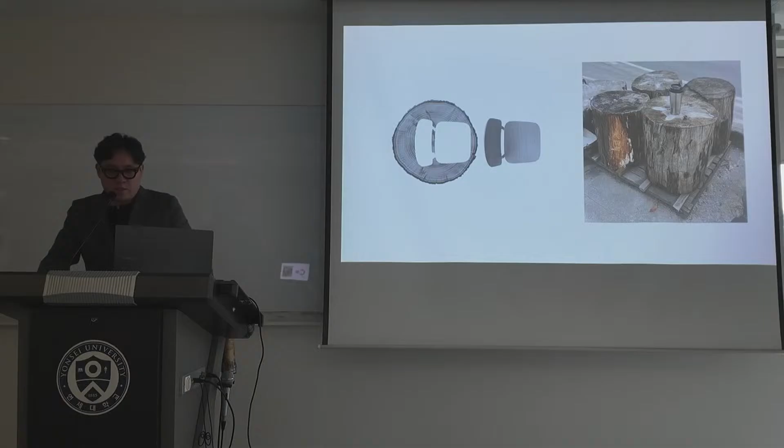Some people start architecture from the final image and imagination, but I just started with this image. This is an old, rotten log base from a wood sawmill that I saw about 2 years ago, and it was about to be thrown away. So I asked them to protect and preserve it, maybe I could use it later for some purpose. I'll come back to this image later in this presentation.

I want to use two words to frame this entire presentation. I'm actually planning not to give an architectural portfolio presentation, but to provide more of a framework for understanding Korean architecture and how we got here. The formwork is a temporary frame, right, to hold the concrete that is poured into it. Formwork is a mentality, a way of working that I'm framing in that way. So in formwork manner, you first imagine the final form, right? Then you build a temporary frame around the final shape, and the material is poured into it.

Then the form is removed and thrown away. So in this construction work, you always come up with the form first, the final form. To me, the final form is determined very early by this construction technique, form comes first and material follows. The framework is different - a frame is not a mold. A frame is made of parts - it's made of beams, posts, joists, rafters, and each one is part of the construction.

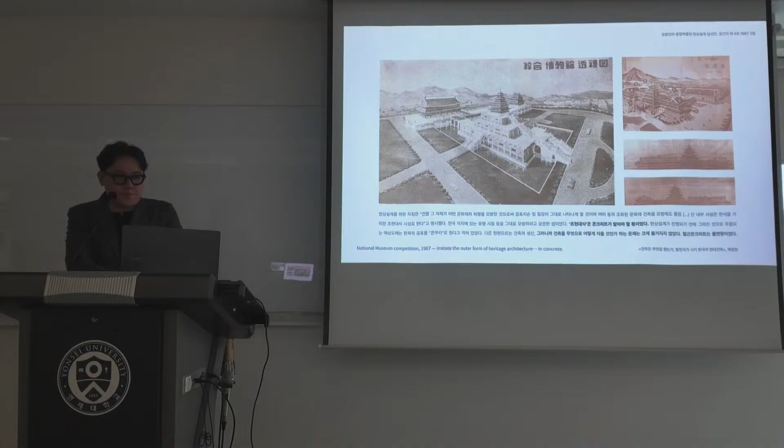1967 is a key moment. We see this even more clearly in Gwanghwamun, the south gate of Gyeongbok Palace. The great gate of the main palace was rebuilt in reinforced concrete. The curved roof, the brackets, the profile of timber structure, all cast in concrete. Very powerful image, right? The image of wood produced through formwork, so timber tradition translated into a concrete method.

It's like a Parthenon temple. You've heard of it, probably from a history course. The Parthenon temple was a representation of wood architecture. The columns, the triglyphs, all of those are representations of wood beams and such. So it's very similar.

I don't say this only to criticize it. It belongs to specific historical moments of our architecture industry. There were pressures of speed, pressures of politics, and pressures of symbolism. But it shows something clearly: wood survived as representation, but not as construction.

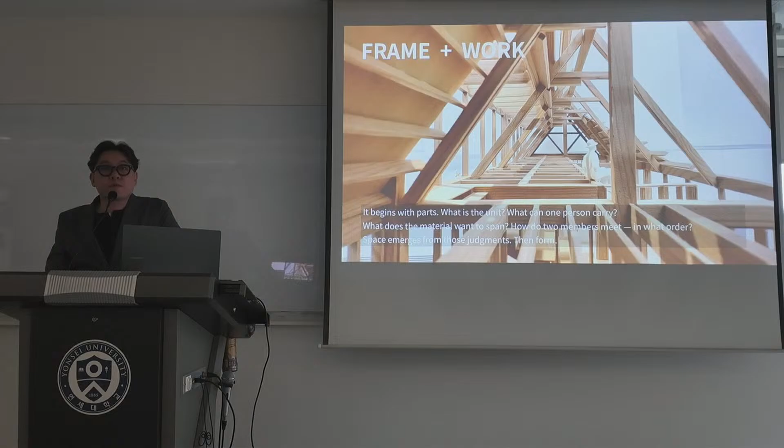So let's make the concepts a little simpler. First question: where does design begin? In formwork thinking, design often begins with an image of the whole. It's true, it is true.

And then we look for techniques to support it. In concrete structure, mostly design, the image comes first, then the details. Someone sees images on Instagram—nice image design, final product, oh it's really good, has good detail. It means details are very secondary to support forms, not the question itself. It's just a kind of cosmetic makeup of the concrete form.

But then we look for techniques. In framework thinking, design can begin with a member, a module, a kind of rule—spacing, like 18 inch on center, 16 inch on center, that kind of thing. A module, a rule, a joint, a repeated action—it's kind of parametric. But both approaches can produce form, they just arrive from opposite directions, as I previously talked about. I think buildings can feel the difference as a final product.

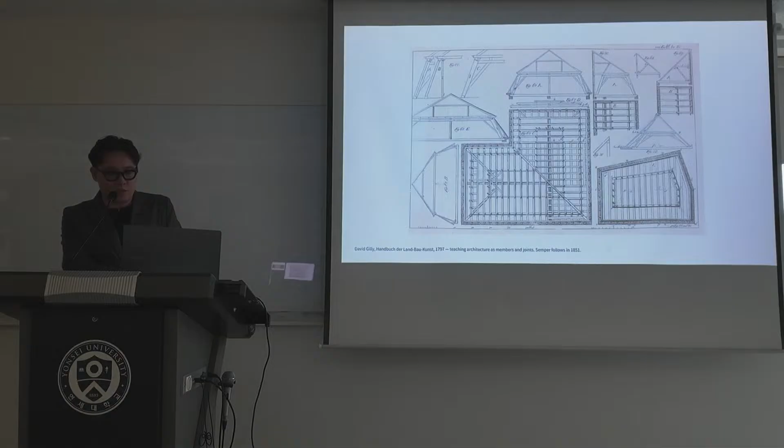Architecture was taught not only as image or composition, but as a language of members and joints from these kinds of books. Later, Gottfried Semper kind of followed this tradition. Then this logic becomes radically practical, of course, in America.

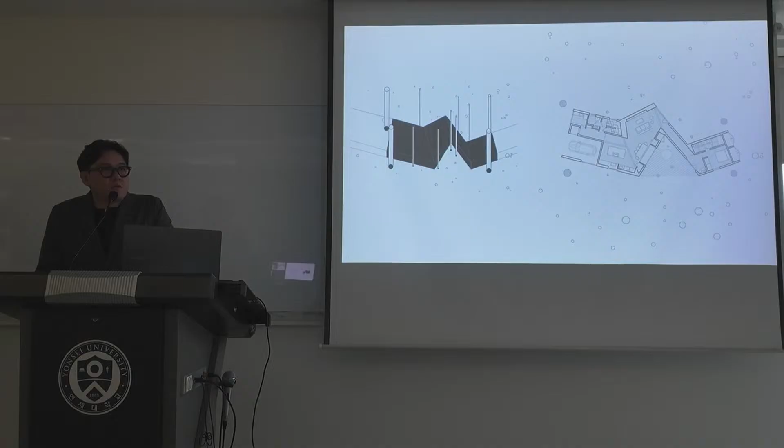So this was the plan. There were 11 existing trees, and I started to build a house through these trees. Often we just kind of scrape off the site — oh nice, that's good, straight off the trees — and build a boxy, modern, nice-looking house. But I started to actually use the trees as a design constraint. I thoroughly prepared the setback lines from all those trees and started to build my own setback line, and came up with this plan.

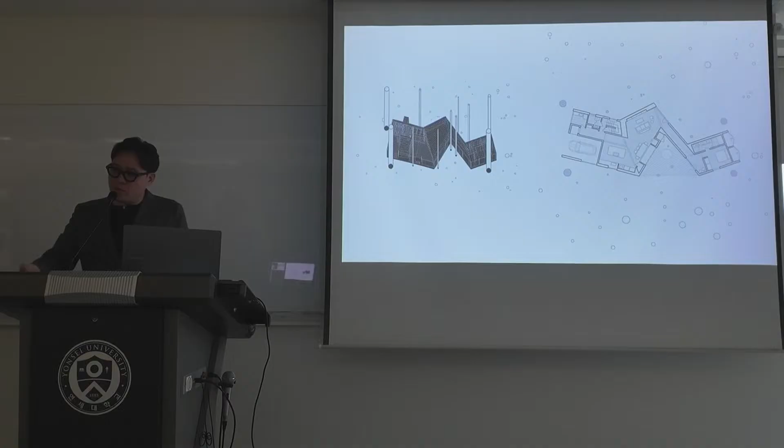The plan is not a series of rooms, it's a flow of program. I did not use any swing doors, to accentuate the continuity of the entire space. I only used sliding doors with a lot of gaps from the bottom of the floor. And this is a very interesting picture and diagram as well.

Actually, this region had a special zoning code — it's a heavily wooded area. Natural preservation, all those things come into the zoning code. So if you have an architecture development, you have to measure the trees on site at a certain height. It's called DBH, diameter at breast height — about 4.5 feet from the ground — and you measure the diameter of the trees on site. If you exceed a certain size, you cannot cut it down. But if you're under that certain diameter, you can do whatever you want.

But we have to submit a form of tree removal, and it has to match the survey — the actual site data of the diameter of trees on site. So I started to utilize that rule as a kind of reverse design alibi. I'll use that, I'll accept that — that line becomes a kind of deadline for the trees, the 18 inches. If you're under that, the tree would be thrown away, but I used it as a design element. So that line actually remained as a very odd line in this photo.

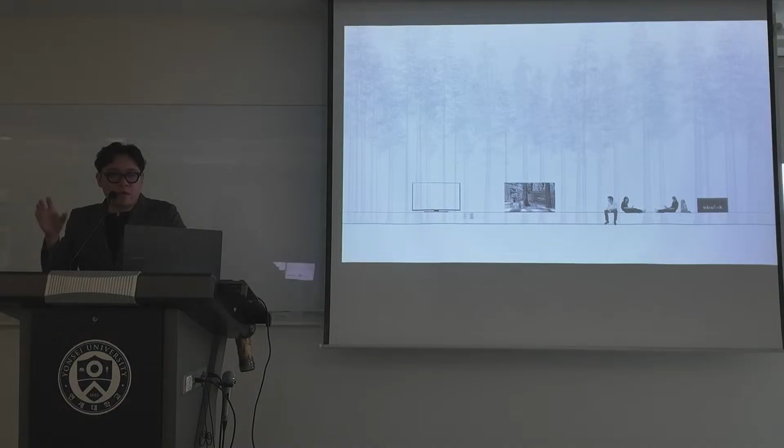So that actually became very serious and important architectural data to determine the height of the benches, the window, the TV screen on the wall, and the height of the firewall. I'll show the pictures later. That data, and these are the processes to find the form.

Maybe this is very formally driven, but not quite. Actually, I came up with the plan first. It was very hard to find that fact in between those trees. And then there was a special building code I had to abide by, a certain angle of the roof, because of the heavy snow region. So when that specific angle meets the irregular plan, it's a kind of nightmare to solve all the flatness, and everything comes to one point.

And then I used, for the first time, a Grasshopper script to be sure that even though it looks kind of irregular, all those green angles, called rafter takeout angles, are identical with each other, and reds are the same angles. So no warped surfaces, every plane must be flat. These are the rules that I set up before I found those final planes. I wrote three rules and tried to follow them: minimize rafter takeout angles, no warped surfaces, and etc.

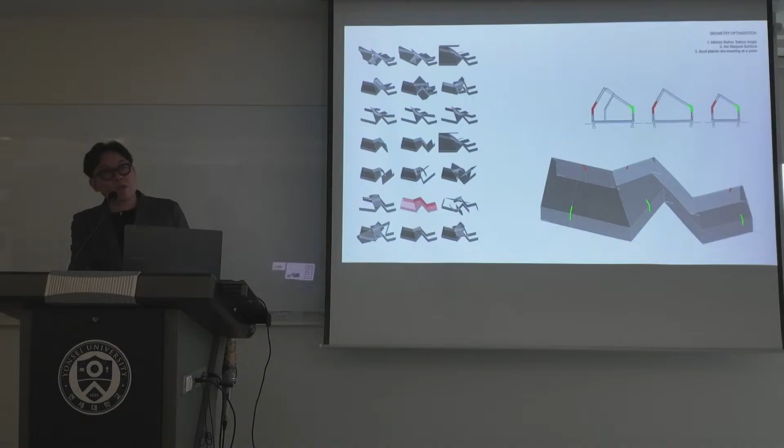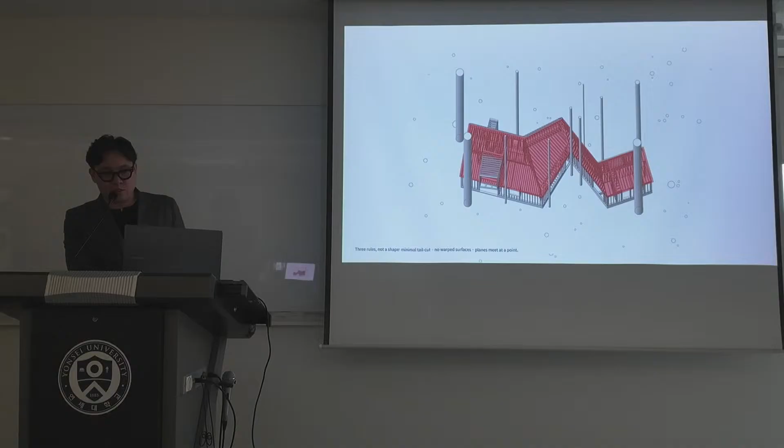Because it's made out of framework, wood is a flat stick, right? So these are the final wood frames that are supporting those red planes.

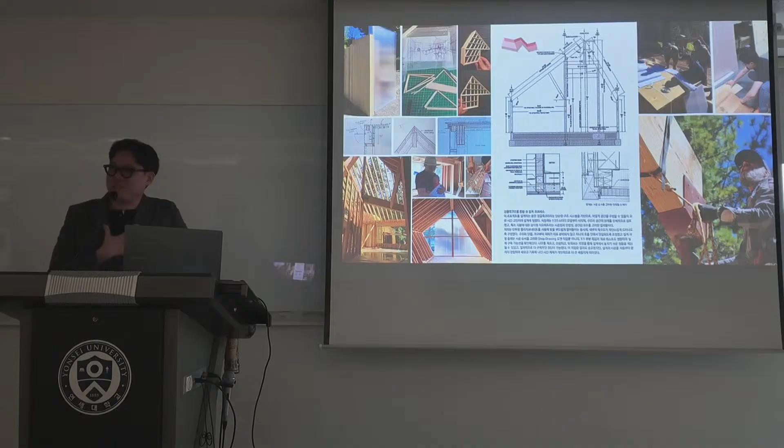And these are American cats on site. These are cats, black cats. It's kind of crazy, right? They're kind of hanging around outside. It's a wild animal, for real. So I had to actually be far away and zoom in to take the photo.

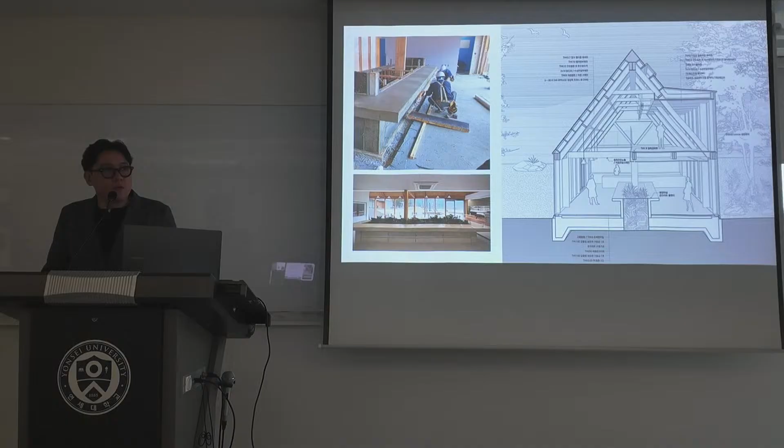So where wood is good and concrete is bad, it's a project where every material has to carry certain meaning and certain role and position. And this is also kind of a framework move. I think of this project through units of building. The two buildings share one triangular shape.

Equilateral triangle - you guys know equilateral triangle. So this one is an equilateral triangle that is exactly 20 feet.

It shows the actual production size of the wood as a material product. I try to intentionally keep that 20 feet as much as possible.

The main members use the standard North American production, also the interval as well.

Do you guys know plywood size? Memorize it? No? Okay, 4x8. Plywood, 4x8 - that means 4 feet by 8 feet, right? So that's a kind of standard international plywood size.

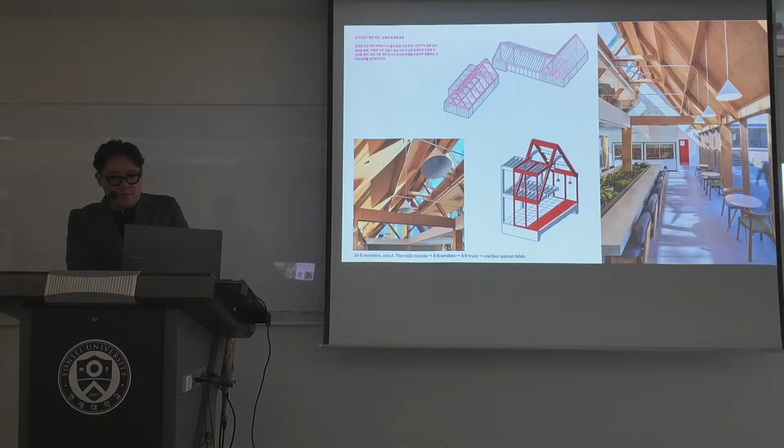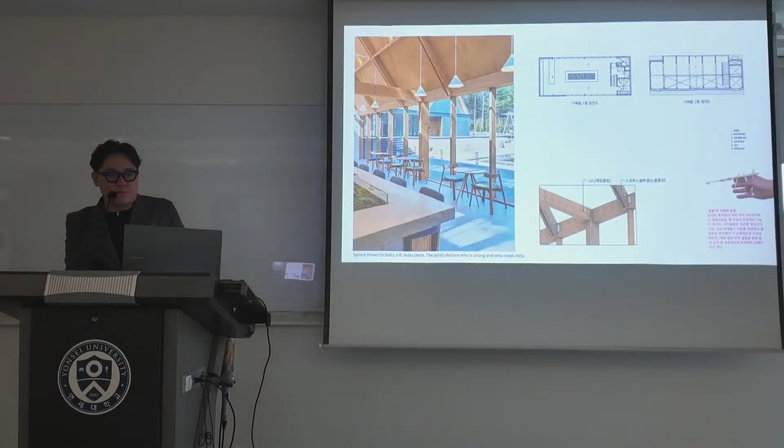So this is the photo - 8 feet module, exactly. So that unit of construction becomes a kind of experiential unit that is occupied by four people on a table. This is kind of boring, so I'll skip. And the final photo.

The lobby was about 12 meters high with marble floor, coarse glass curtain wall, polished surfaces of stainless steel - very impressive, high quality commercial space. But also a space people mostly just pass through, a commercial lobby. The DNA of those big building high-rise tower lobbies is always an underused space.

So this project began from the construction condition. The lobby was already finished and in daily use. They asked, before we even started the design: no welding, no dust - it's a financial headquarters.

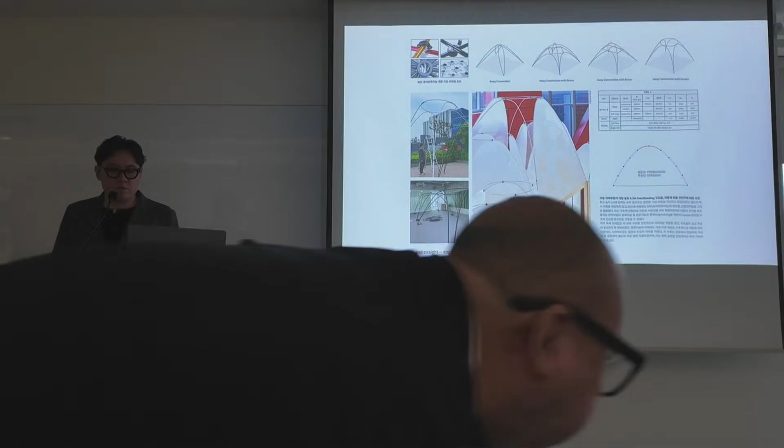Constrained naturally from ready-made products or materials, they already contain a certain amount of intelligence to make that as a product - the wood, the aluminum poles, and all those. So I think an architect's job is not always to invent new parts. In concrete work, sometimes we're actually forced to invent something, but in framework I don't think that's the normal case. Sometimes it's just to reorganize the existing knowledge.

So for the biggest dome, we had only 4 people and half an hour of time window. Only 4 people to hold the corners of the 4 domes. So everything became a design constraint leading to the decision that I had to use 10 poles, otherwise it would be too heavy for people to lift. And it had to be lifted up a ladder, not with mechanical lifting equipment, just a pure ladder.

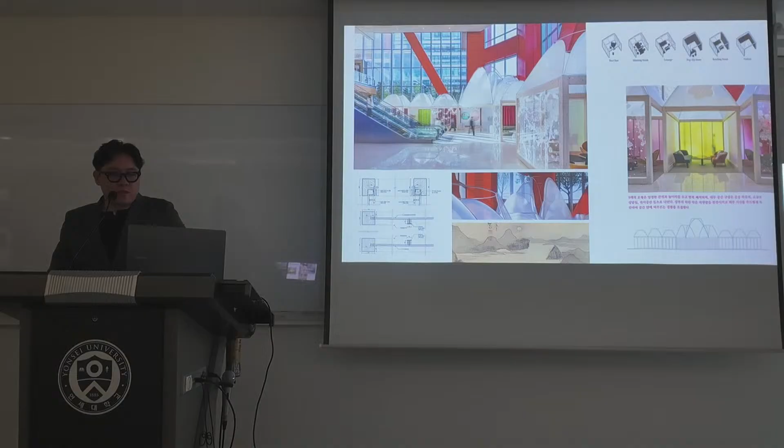Everything involved complicated parts, and I had to assemble one side - well, I didn't assemble it myself, but they did. So finally, here are the final photos.

Okay, 10 minutes - give me 10 more minutes, I'll finish.

This is the renovation design, a library design. I did a really tiny project, that red portion shown here. I'm showing this project because framework isn't just about material or a way of thinking.

In this case, I used framework to control the construction of the hall. This is a very old library in Gwangju, opened in 1981. For years it served as the city's representative library, but they're building a new one and essentially retiring this old building - new and you're out. The new main library was being planned and was already under construction, so this was almost a retiring building.

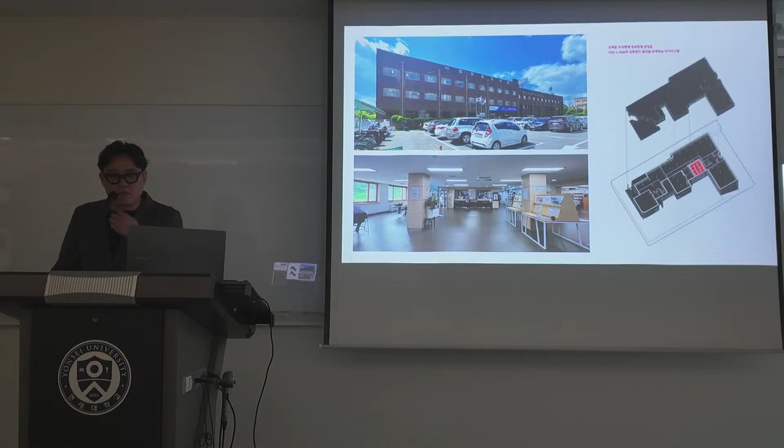The budget was tiny, so it could have been almost just a furniture replacement, a layout project. But I wanted to treat it as a kind of small experiment.

In most small interior construction projects, if you look at where the money goes, it's mostly poured into labor. The smaller the project, the more you actually spend on labor. That's not good - it's like sugar, a sugar cube that just disappears after the project, the labor fee.

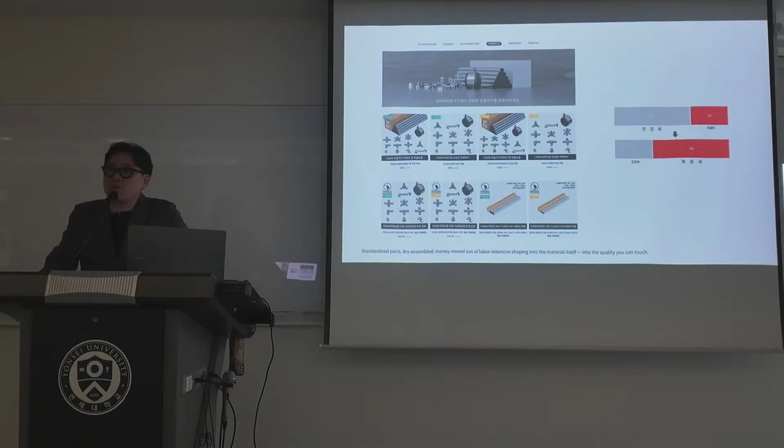So I wanted to use the money more on the material itself because it remains permanently. I decided to use ready-made products, small furniture elements. In this project, everything was standardized and dry-assembled so I could minimize labor and carpentry costs. Less money went into labor-intensive shaping, more money went into the material itself - into things people can actually touch.

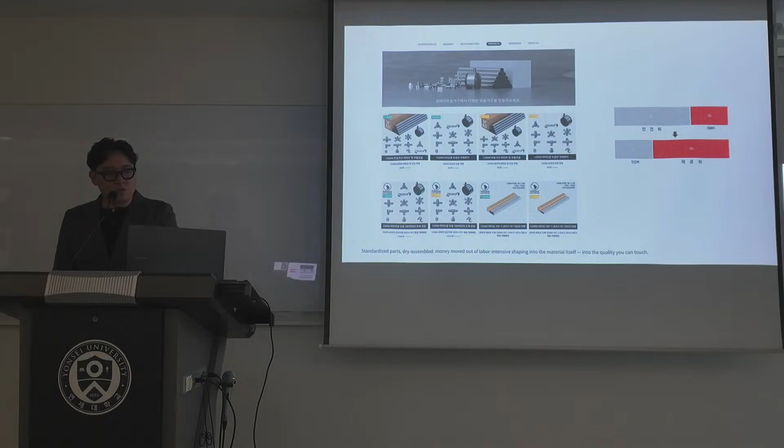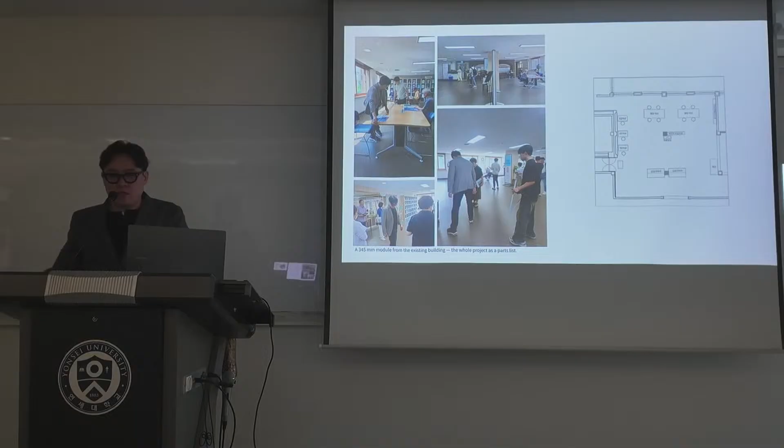So we measured - I went there and spent the whole day measuring the existing ceiling modules, grid, and columns, and from that I found this magical number: 345 millimeters. It's very specific, but I came up with this module because it could accommodate everything - existing ceiling modules, floor, and column locations. So here you see the world of the 345 millimeter module, all dry-assembled ready-made product components.

This product is actually made for small furniture, but I used it to expand across the entire space - off-the-shelf pipe and clamp furniture system parts: desks, partitions, display stands, different functions but identical parts. The whole project was essentially a parts list - pipes, connectors, and things like that.

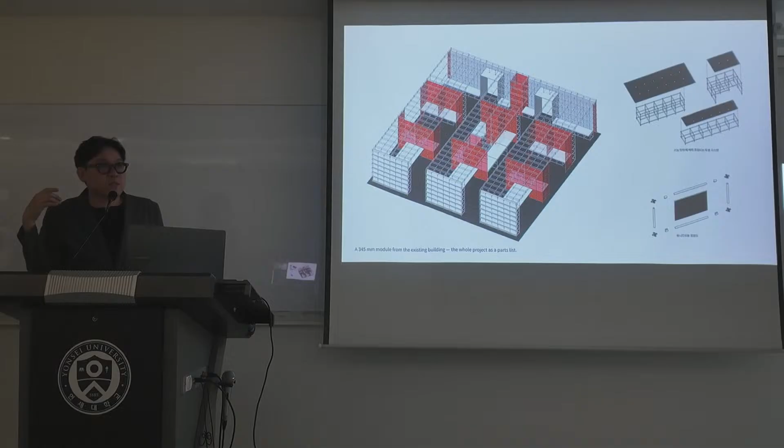So parts make the whole, and the whole decides how the parts combine. For example, if I want to build a desk using 2x3 modules - 2 on the vertical side, which is 690 millimeters, by 1035 millimeters on the other side - that's perfect for a handicapped person's desk. That became the module for one desk.

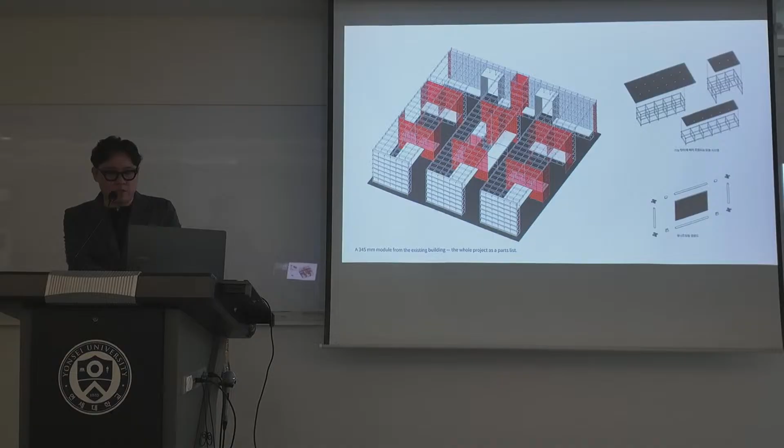This desk was supposed to replace what was moving from the first floor - I threw away the very old desk and made it all new. Let's see the construction floor, now finished. Even the book display stand is a ready-made product - you just order it through Coupang, Amazon, or Alibaba.

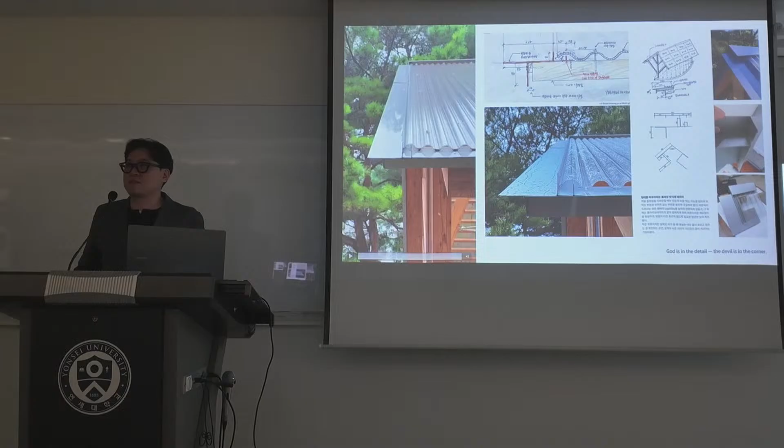So first, I'll try to just go quickly on this page. It's a self-initiated project on our campus, allowing students to smoke under heavy rain. They stay dry and can enjoy smoking, whether electrical or actual, it's a real good service. It's a public good, right?

So I actually also worked this as a design builder. I was the general contractor for this project as well as the designer and architect. Building it myself taught me things no drawings ever had.

When you layer real materials at full scale, you meet problems that drawings hide: a corner where water collects, a screw that cannot be reached, a flashing line that looks simple until rain actually arrives. I started saying this to myself: that corner condition, God made. The famous phrase is that God may be in the detail, but the devil's in the corner. The corner details are a kind of nightmare in every project.

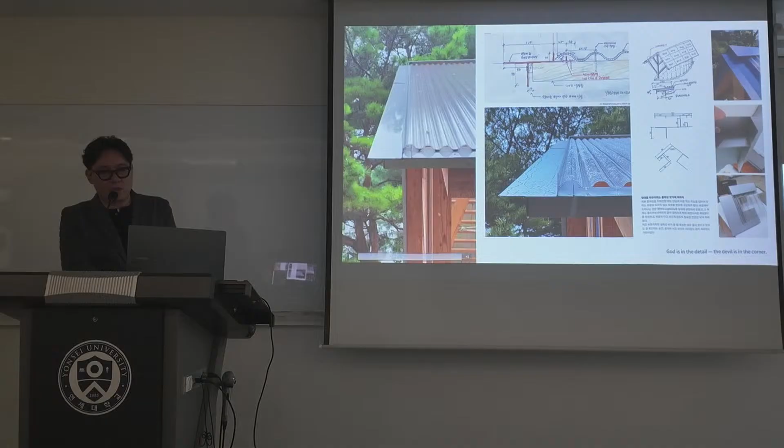So when the first rain came, the water ran exactly where it was supposed to run, and stopped exactly where it was supposed to stop. I felt something very simple for a moment — I felt the distance between the drawing and the building disappear, as the general contractor for this project.

Now back to the first idea. The two columns of the pavilion are large glulam pieces, the same species exactly as that abandoned large log. So the young, large, processed glulam is standardized, and this old log was large as well — same species, different generation of material.

So I made the column base out of that log, with a younger piece of glulam standing on an older, mother-like piece — one generation of material resting on another — so that I could represent the entire cycle of one material, from the log, from the birth mother, to the descendants, the glulam pieces.

Almost like a child standing on the mother's time. I know that sounds a little sentimental, but in the actual building it is very simple — the material's path becomes visible in just one single vertical line: tree, log, lumber, column, things like that.

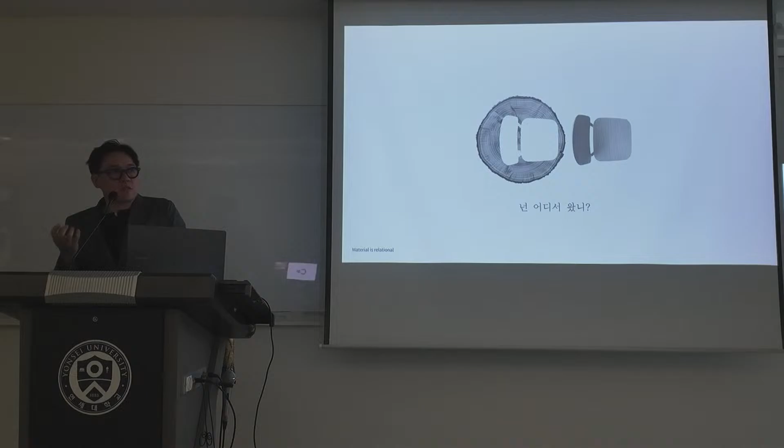All right, I'll just close it here. Thank you.

It's quite a great lecture, lots of inspiration for me. So, any questions? I like his talk on frameworks. Any questions? Any questions at all? No, not really — come on.

Yeah, I have one question. Compared to formwork and framework — as I understand it, framework means a bottom-up process rather than a freely given form. Instead of a free given form, you develop your form from frames, joining lots of different parts together. But when you design as an emergent, bottom-up system, it's easy to fall into chaos. So you must have your own discipline to organize or control the process. When I look at your library project, for example, you must have your own discipline — what is that discipline?